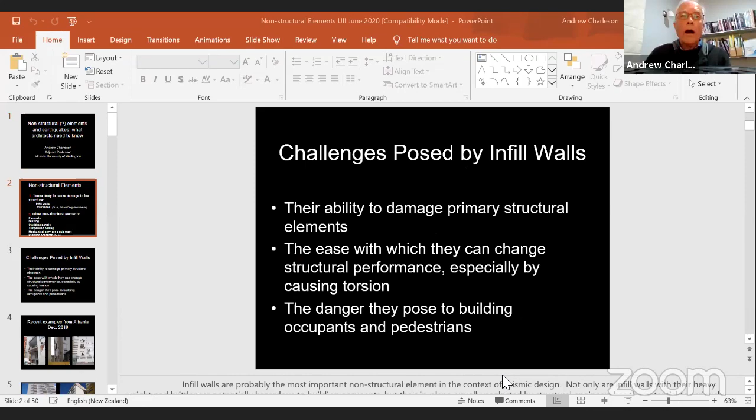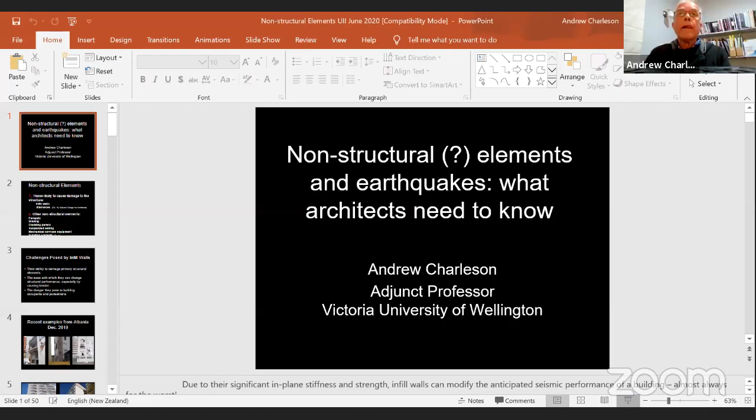Please excuse me, I'll just share my screen with you. And I just want to start the slideshow. Here we are. Okay, there we are. Is that clear? My first slide? Yes Prof, clear. Okay great, excellent.

First of all, you'll notice a rather strange feature of my title - I've put a question mark there, because otherwise it would say 'Non-structural elements and earthquakes, what architects need to know.' Today I'm talking about non-structural elements - elements that you as architects are primarily responsible for designing and specifying. But the reason for the question mark is that there are some non-structural elements that you design and detail, but because of their strength, these elements act as structural members without you perhaps even realizing it.

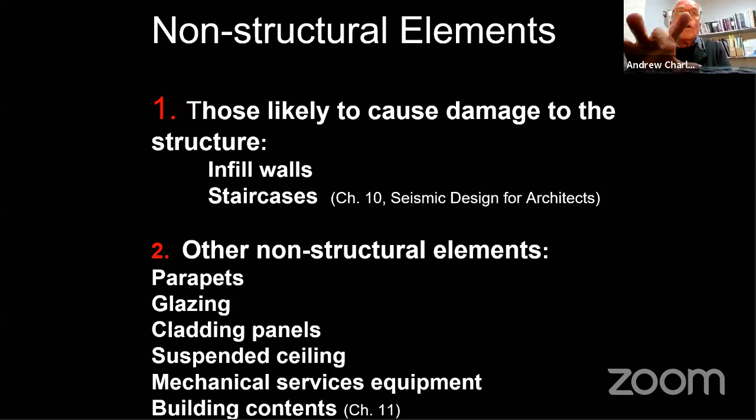So I'm going to start the presentation by talking about infill walls, because they have the ability to damage the primary structural elements, namely the columns of a building. They are also a problem because of the ease with which they can change the structural performance of the building, especially by creating or causing torsion - they can cause buildings to twist, which can lead to collapse. Finally, the challenge they pose is that they're usually quite heavy elements, so if there's a chance of them falling inside or outside the building, they're very likely to cause serious injuries to occupants and pedestrians walking alongside the building. These are the main challenges infill walls provide.

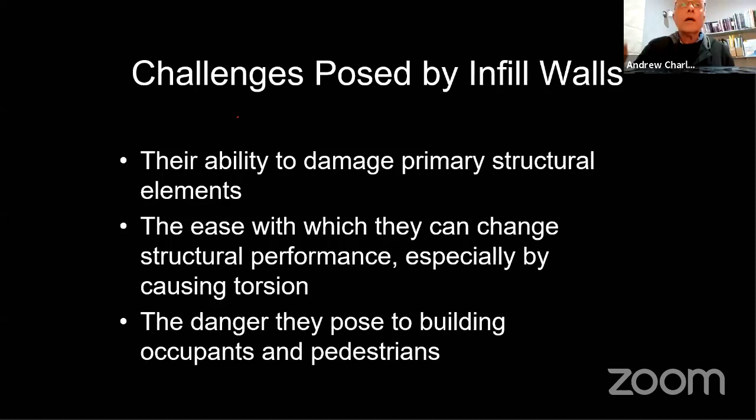I want to start my talk about infills by sharing a very recent personal experience. I visited Albania in December last year, about 6 months ago. Just one week before I arrived, Albania was hit by a moderate earthquake. It wasn't a large earthquake, it was moderate. Near the capital city where I was staying there was another city called Durrës that was quite close to the epicenter. A few days after my arrival, I visited Durrës, and these are some of the photographs I took.

I was just shocked at the amount of damage to infill walls. This damage is still very fresh in my memory, and it makes me very passionate about sharing my knowledge of infill walls with you.

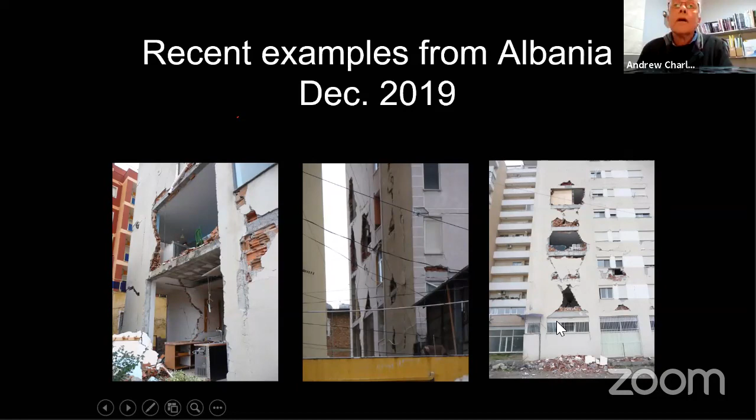Two final examples to show you. Here's another building - imagine living in these apartments. You'll see all the other infills have got big cracks in them, a lot of cracking and damage. This infill is cracked here, around here, and down there - it's almost on the verge of falling out. So many of them are.

The final example is a building we actually went into. Many of these infills have fallen out, and you can see directly into the rooms. This was one of the bedrooms we went into. Just imagine how terrifying it would be to be lying in your bed and have big chunks of infill falling around you.

All these infills were specified by architects because engineers generally neglect the presence of infills - we might talk more about that later. But it's your responsibility as an architect to choose the materials of these walls, specify them, and show them on your drawings. Not only infills, but also partition walls, because they are equally as problematic. So you can see how I had this first-hand experience just 6 months ago, and I'm feeling quite passionate about the problem that infill walls cause.

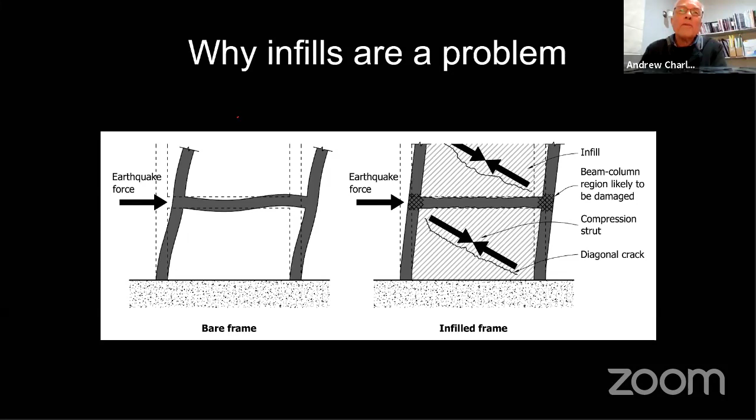So this is the explanation for why infills get cracked, how they form compression struts, and how those struts cause damage at the tops of the column and sometimes at the bottom of the column as well. So maybe you are starting to get one or two questions from my explanation. So please just type them in, and we'll come to them as we get to the end of the presentation.

Yes, Prof. Andrew, there is one question here from Pak Buti. Would you please explain again about infill wall? Does it mean a wall installed after the concrete structure is cast is not an infill wall, or the other one? Yeah, thank you. Yes, these infill walls are constructed after the structure.

So the columns are finished, the beams are finished, and then the mason comes and lays the brick wall. And so usually the brick wall is not anchored strongly to the columns or the beams. So that's the infill I'm talking about.

And what I said earlier was I'm not talking about confined masonry construction, where you build your masonry walls and then you cast your tie columns and your tie beams. Because we know that confined masonry, which you use a lot for housing in Indonesia, can be very effective at resisting earthquake, but not infill walls. They are problems.

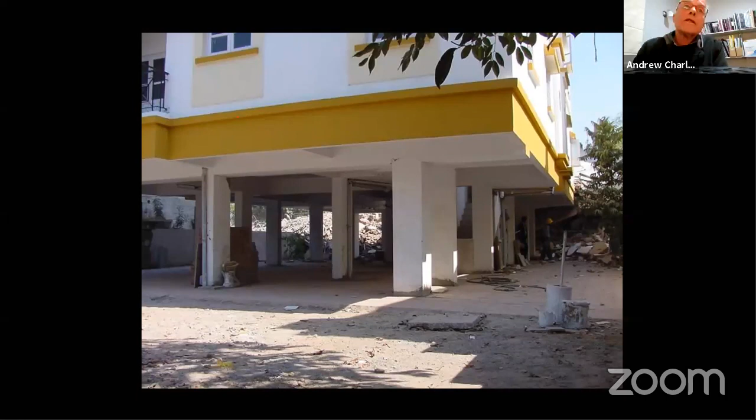And here's an example of a soft story building, actually in India. See how the ground floor is open? But above, you've got masonry infills, making the upper floors very stiff and strong. And so in an earthquake, these columns will get severely damaged and the building will probably collapse.

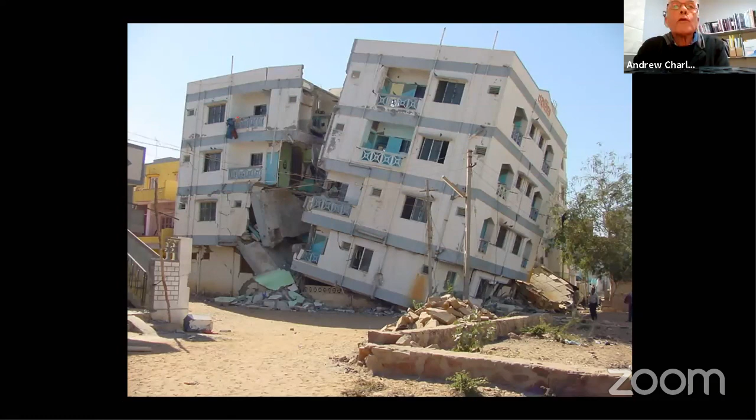I'm going to show you some examples of buildings with soft stories caused by the infills. And here's a building also in India. See how the bottom story has collapsed because it probably was open. But look at these strong infill walls. They haven't even cracked because they're so stiff and strong.

And so over here, you can see some diagonal cracks in the infills, but actually there's been quite a lot of damage to the infills, but this particular part of the building is still standing.

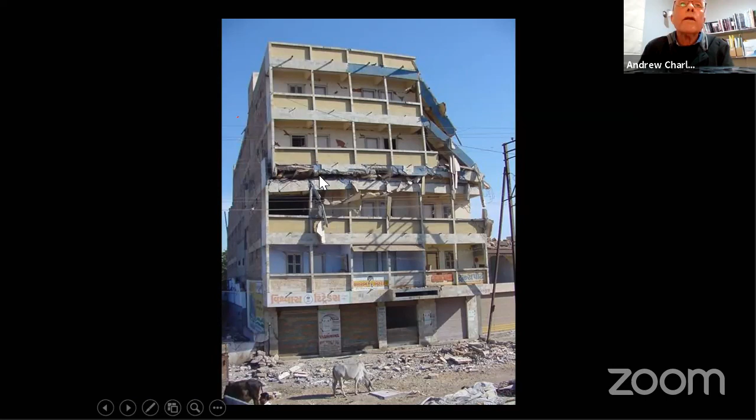Here's another building where the infills are quite badly damaged in most stories. But see, this story has collapsed because probably there weren't any infill walls in it. Maybe in this story, the architect had just used light cladding. But for the other stories, strong infills have been used, and that has made this story very weak, and the whole story has just totally collapsed.

Usually, it is the ground floor story that is the soft story. That happens in about 90% of the cases. So this is a bit unusual to have it mid-height, but it happens.

And so let's look at the damage to the tops and bottoms of columns. Here's a building that has been through a large earthquake. You can see the damage to the infills. Some have fallen. But if we look carefully, we can see the way, for example, this column has been damaged, caused by the compression strut up here. You can also see diagonal cracks in some of the other remaining infill walls.

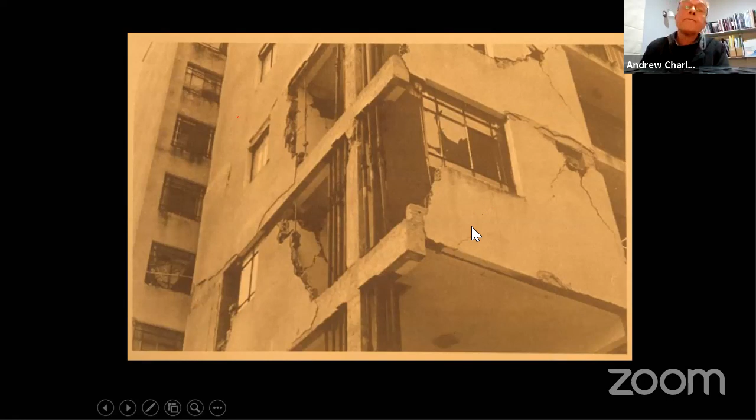Here's another building where the columns have been damaged by the infills. See how the top of this column has broken. The concrete has been lost and the bars are buckling. Here, the bottom of this column has gone and the top of this column has gone. And here you can see a diagonal crack has passed through these two panels.

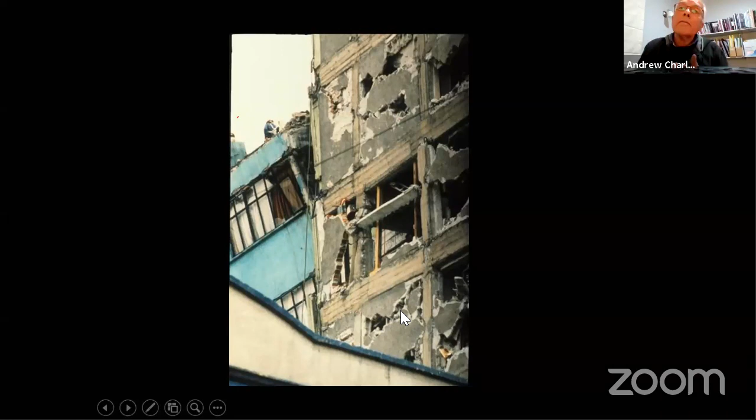You can see extensive damage to these infills because the frame is pretty flexible, and therefore the stiffness of the infills means that they will suffer a lot of damage. Here's an infill wall here that has caused damage to the top of this column. And so the whole floor slab has moved down and it's pushed the infill wall out to the side.

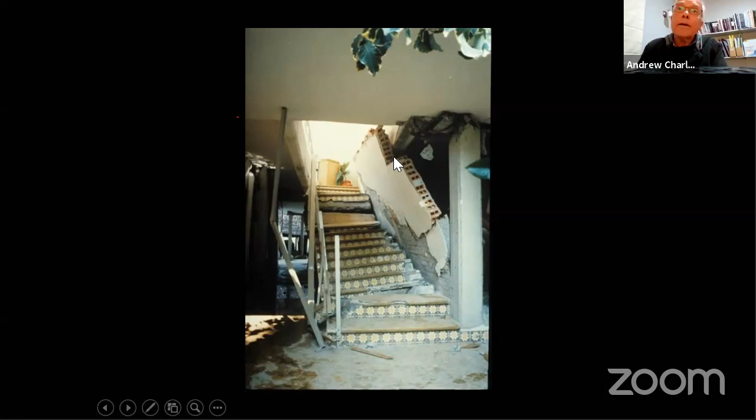And this is actually a supermarket building in Indonesia that I visited many years ago. It's near Lake Toba, actually, in Sumatra. And first of all, you can see some infill walls have collapsed and are sort of lying on the floor. But notice the tops of all these columns, badly damaged because of the compression strut in the infill before the infill fell over. And this damage occurs everywhere in the world during an earthquake where these strong infill walls are used.

I mean, these infill walls look as if they've been made from concrete blocks, don't they? I can't see any bricks actually. So this would be concrete block plastered to create the infills. And you can also see there's no connection between the columns and the beams and the infills. There are no bars sticking out, nothing to stop the infill falling once it gets a lot of cracks.

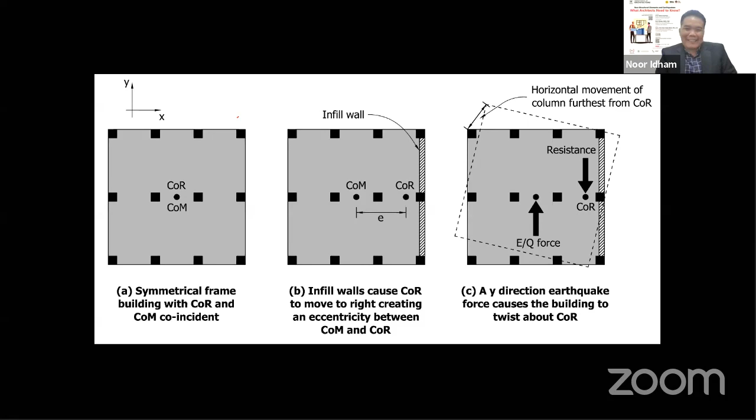Well, here we are. Now I'm going to talk about the solutions. I've been very negative so far. I've been just telling you about the problems. But my purpose has been so that you understand what the problems are. So now I've outlined the problems, I'm talking about the solutions, and there are going to be a number of solutions.

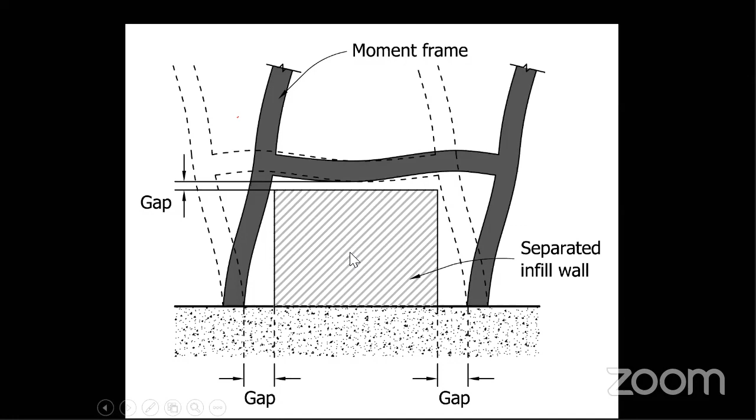Maybe someone can switch off their microphone, please. Yes, sorry, Prof.

Okay. Now, the idea is that we create these gaps between the edge of the infill and the columns so that when the frame moves in an earthquake, the frame will not hit the infill. And so the infill will not cause a diagonal strut to affect the structure.

And so in practice, in some countries, it looks like this. Here's the concrete frame. Here is the infill. Here are the gaps, physical gaps, maybe 2 centimeters wide, maybe wider. And then to stop the infill from falling from the building, we must have practical columns. You call them kolom praktis, I think. Practical columns, and they will stop the infill from falling at right angles to its length.

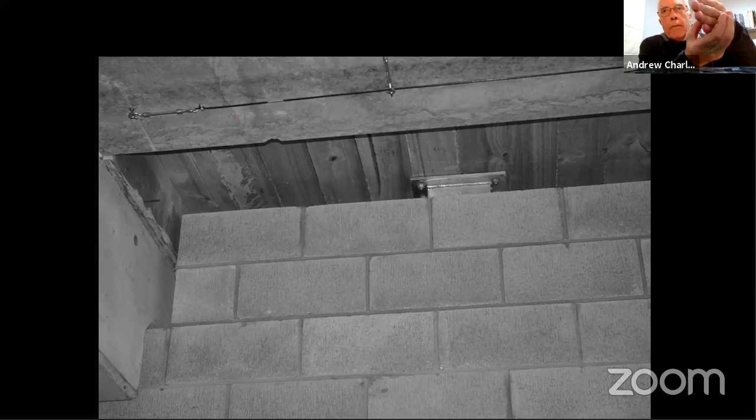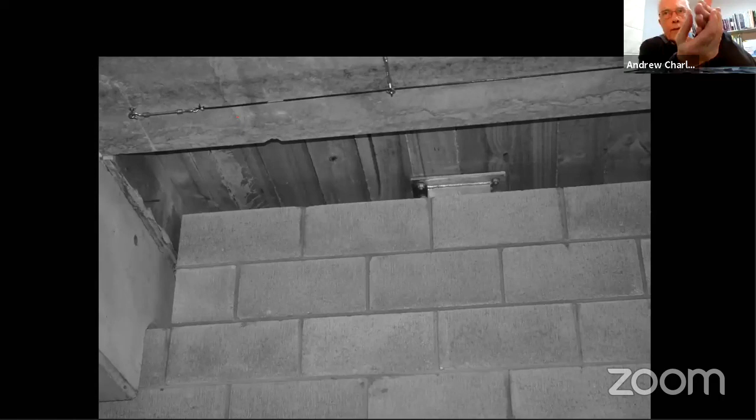And so in an earthquake, the floor above can move without affecting the wall. But the wall can't fall because it's restrained by the steel plate. And so the separation is achieved by allowing that steel plate to move like in a groove, but then to prevent the wall from falling by the strength of the concrete blocks, like that. I'll just go back. And so this is one solution to separate.

And so as the architect, you have to ask your structural engineer what gap you need, because the engineer has to do careful calculations to work out how much your building will move sideways during an earthquake. And your structural engineer might say to you, well, look, you need to have a 5 centimeter gap here. Now, you might say, look, that's too wide. I don't want to have gaps 5 centimeters wide.

And then the engineer could say to you, well, okay, if you don't want to have wide gaps, I can make the frame stiffer so that it won't move so much. And so then the engineer can make the columns and the beams a bit larger, and maybe the gap only has to be 2 centimeters. And so you as the architect can have negotiation and discussion with your engineer.

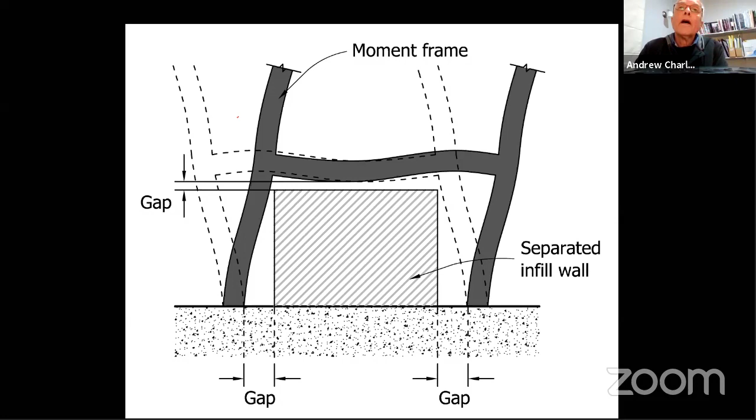But the good news is that there are other solutions. And we've already discussed one solution. Use lightweight cladding. So if you're using cladding of, say, plywood or... can you tell me what sort of lightweight claddings might you use in Indonesia these days?

You might use fiber cement sheets, mightn't you? Fiber cement cladding - well, that is very weak and light. No problem, it won't damage the structure. It won't cause soft stories.

The second option is to use, say, precast panels as infills, or maybe on the outside of your structure, but you design the connections of these panels to allow movement.

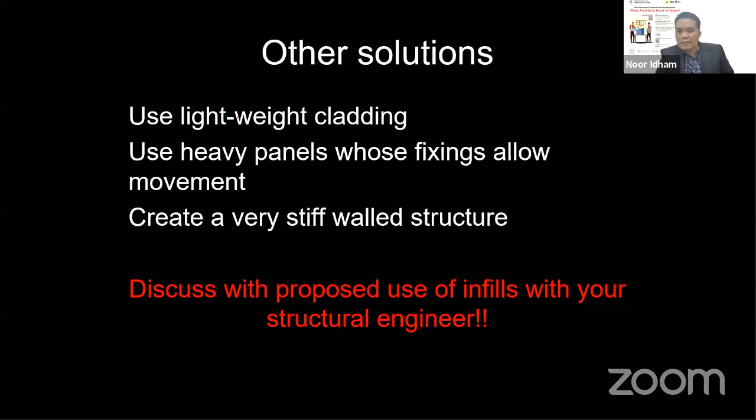Well, each building has to be evaluated separately. But say you have a building with an open ground floor with stiff infills above. One way to improve that building is to create separation gaps between the infill and the columns and beams, and that might prevent a soft story occurring. There are actually many different ways we might retrofit a building, and each building is different and has to be carefully considered on its own merits.

Heavy, stiff and strong infills are certainly a problem, except that if you had a building where your infills went right down to the ground, then the infills might be helping your building. In some instances, your infills can help, but the infills must start at the foundation and go to the roof, and they must be symmetrical in plan. Then it's possible for infills to be okay.

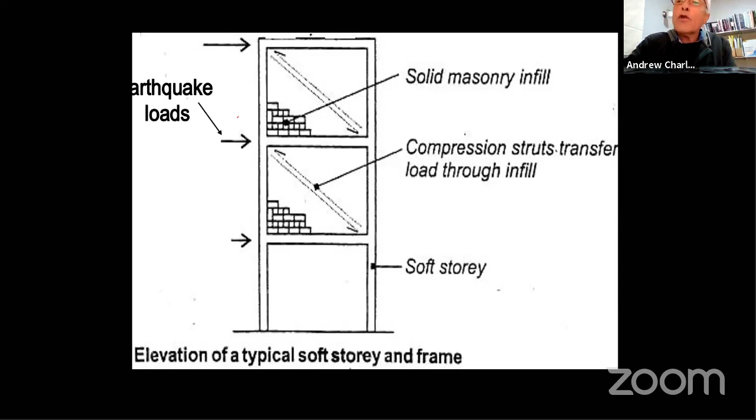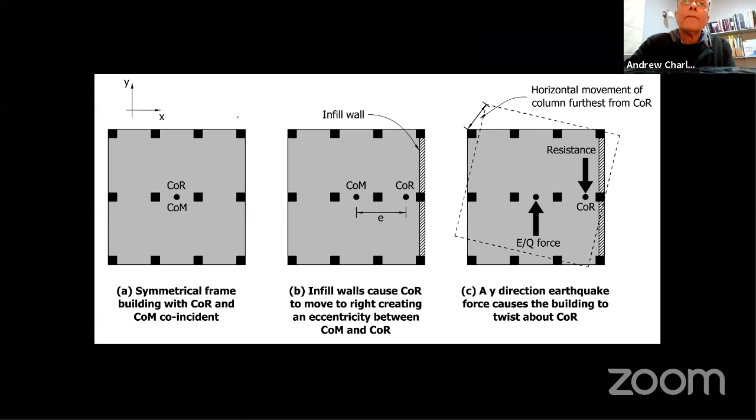But we might have to add some practical columns to stop the infills falling in or out of the building in an earthquake. That's all you might have to do, and that might make your building safe enough.

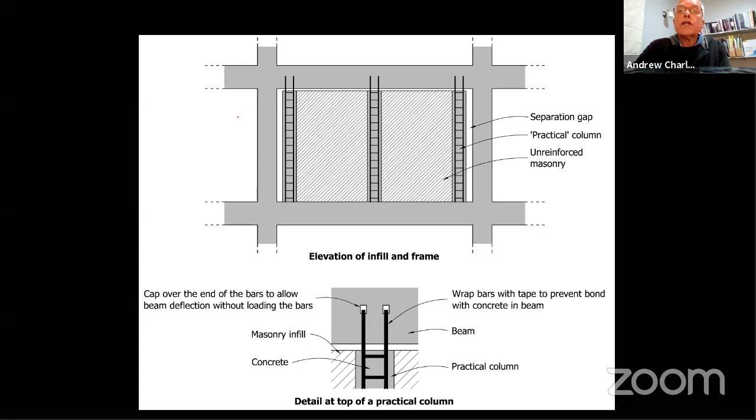Are there any other questions at this stage? Okay, please continue, Professor. Okay.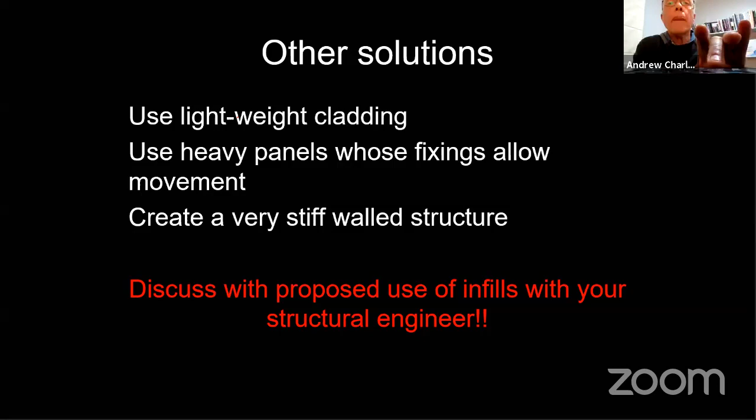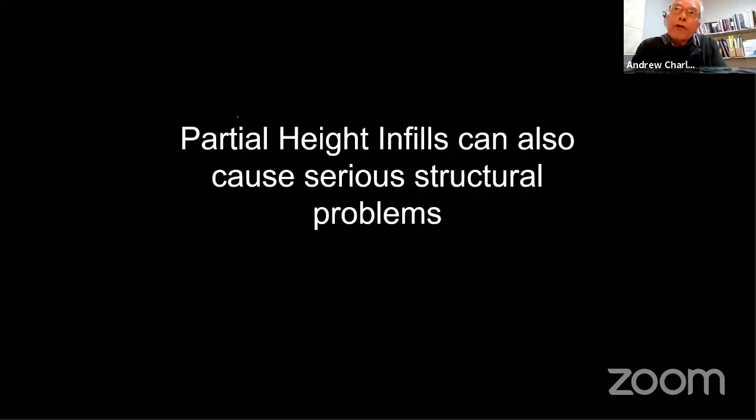I want to talk briefly about partial height infills because they are very common. Here's a frame, this would be glazing, so the infill only comes to this height. So how do we separate that? Well, we need practical columns to support the infill for what we call face loading, to help stop the infill falling.

Here are the gaps to allow for the movement, calculated by the structural engineer. And then to make sure that the infill doesn't fall when there's shaking, like this is a plan: here's the wall, here's the column, this is the gap, and we need like 2 steel brackets in the corners, and that will prevent the infill falling into or out of the building.

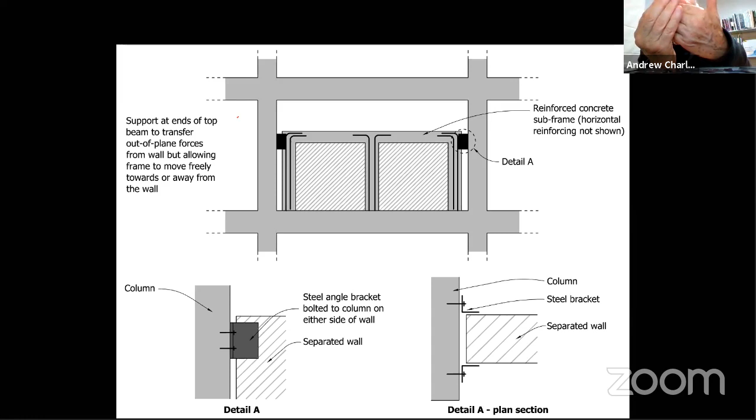This is a very crude detail, but it just shows you the principle. So the frame can move, this is the steel bracket, here's the wall, and the column will move like this, but there'll be no structural forces forming in the infill because of the separation. The infill can't fall because it's restrained by the 2 steel brackets.

This is what we would design in New Zealand or in California, Japan, and many other countries, something like this for partial height infills. If possible, we would try to make these infills lightweight, but if that's not possible, then we'd do something like this. Or we would use some type of precast panel cladding, and I'll discuss that in a minute, I think... actually, no, maybe I'm not going to discuss it.

Well, I think I'm leaving infills now. So just before I leave infills, shall I see if there are any questions?

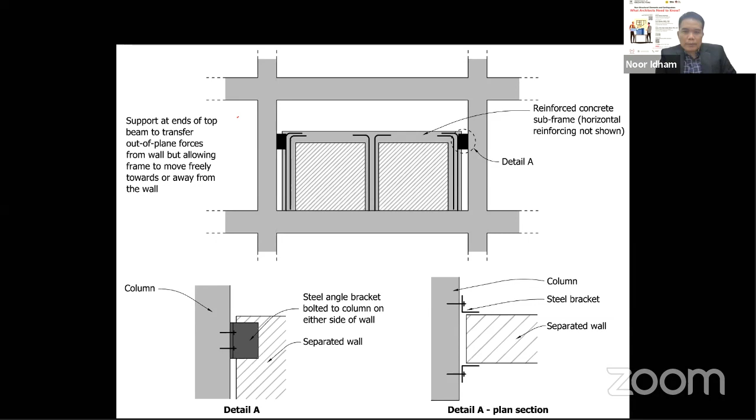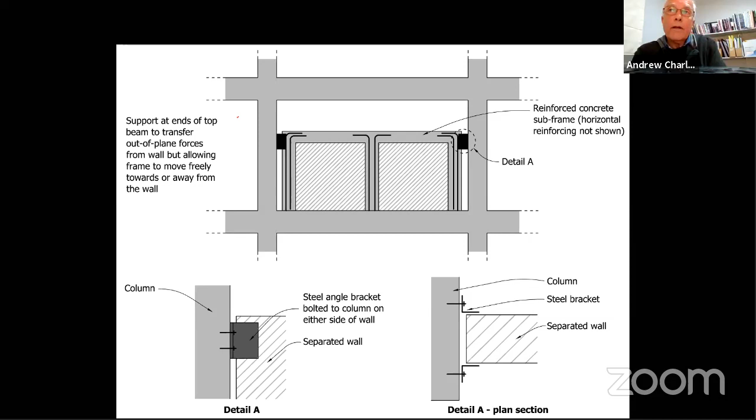You'll remember that there are only two types of non-structural elements that damage the structure. The main element is infill walls, and the second element are staircases. They can cause serious structural damage. But fortunately, the solution is so simple.

So what's the problem? Let's imagine a very simple scenario. Here's a building, and here are stairs going up each story like that. Now, in an earthquake, these stairs can function like a diagonal strut. So in many buildings, when there's an earthquake force pushing the building sideways, these stairs go into compression. And they can go into tension.

Of course, stairs aren't designed to be structural. They're non-structural elements. But if we're not careful, the stairs think they're structure, and they accept very strong compression or tension forces. And that causes a lot of damage to the stairs, and it damages the structure.

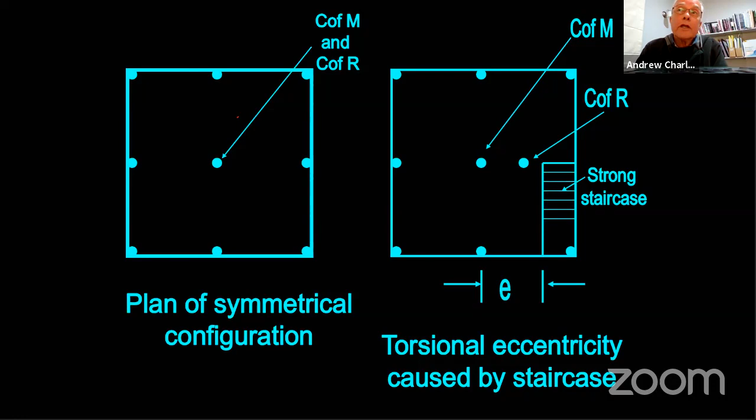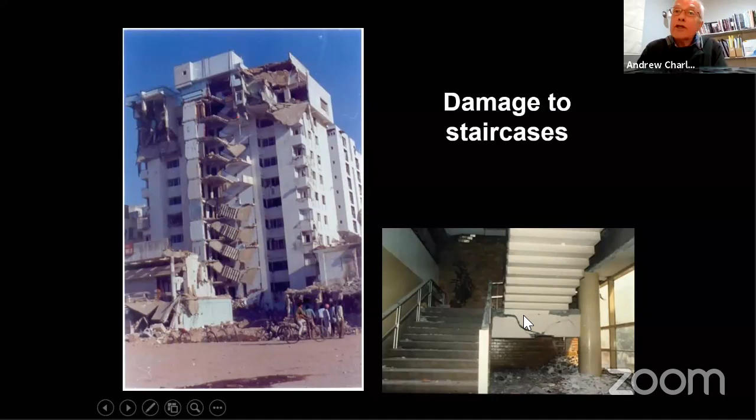The solution is so simple. We imagine we put the bottom of the stair on a roller, so that during an earthquake, when the floor above moves, the stair just slides on the slab beneath. A simple sliding joint is all that we need as a solution.

It's so simple. So what we do is we have just maybe a plastic sheet here, and there's no bond between the stair and the slab. Just sliding can occur. And then if we do that, the stairs just slide on the slabs and they don't become structural members. They don't cause damage and they are not damaged. It's a perfect solution. Incredibly simple.

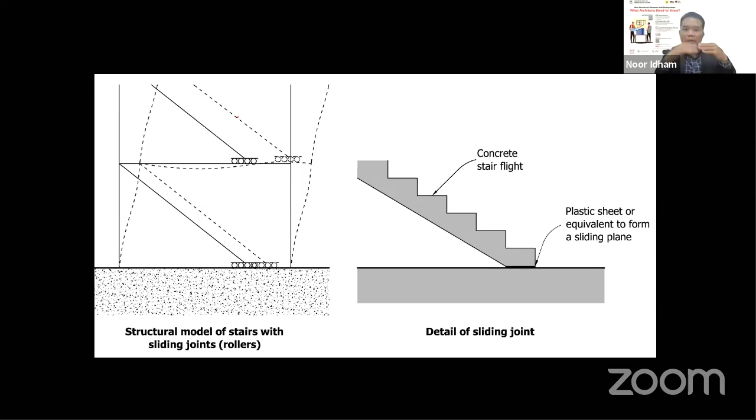Yeah, that's such a good question, and that person has got a very good understanding of how to solve it. Have a sliding joint either at the top or the bottom, really simple. And the material for this separation is just only a sheet, isn't it? Yeah, I've shown there a plastic sheet, but anything that allows sliding works. You don't actually need anything special, it could just be concrete sliding on concrete, as long as there's no bond between them.

Question from Ibu Rosmiati Arifin and from Pak Jafar as well: What about the symmetric way, Prof. Andrew? Sometimes in buildings, we put the staircase in a symmetrical way. So will it have a problem with this, or do we still have to use this separation at the bottom of the staircase?

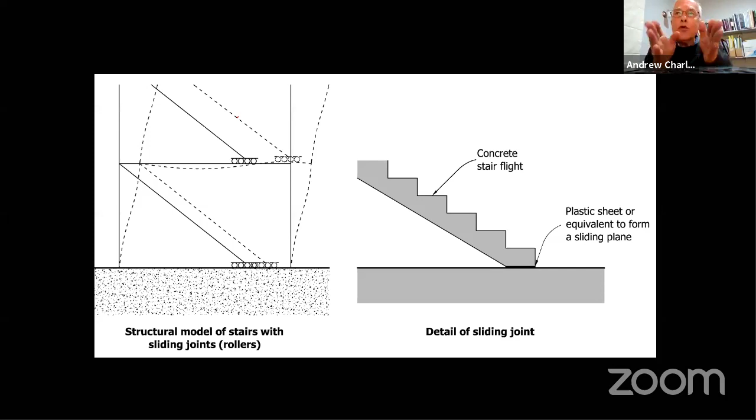Yeah, you should always use a separation because the building is going to move, it's flexible. If you have two stairs that are symmetrical, okay, there's no torsion, so that's good. But you will still get the diagonal struts forming, and that means that the stairs will get damaged or they will damage your structure.

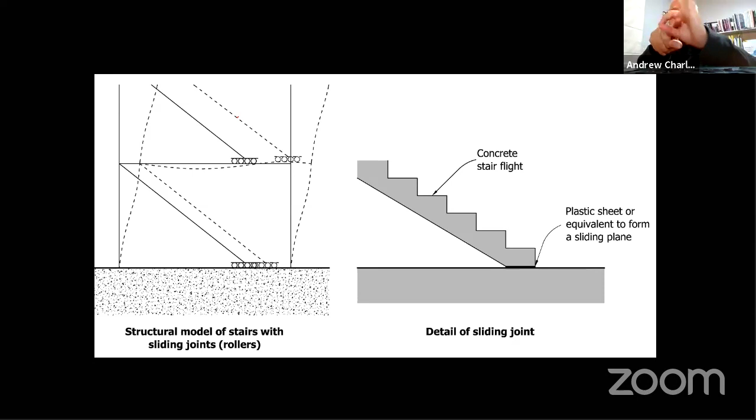So as a rule of thumb, every stair needs separation. And even if you have steel stairs, what you would do is have a bolt in a hole so movement can occur. Always allow for that movement to occur.

So including a staircase in the core, for example, do we also use this technique? Yes, that's right, you should do it in the core as well. You don't need to do it if your building has very stiff shear walls, because then there's going to be very little movement, so you don't need to separate. But for the vast majority of buildings, we need to have these sliding joints.

But as I say, the beauty is that they're so cheap and so easy to make. There's really no problem with them, we just have to detail them and specify them.

Is there any instability issue if we separate this from the main structure or stairs themselves? No, none. All that happens is the bending moment diagram will change a bit, because the engineer might assume this end is fixed and this end is fixed, and therefore the stair can be a little bit shallow. But if we have a pin sliding joint here, it does mean the stair has to be a little bit deeper, just a fraction.

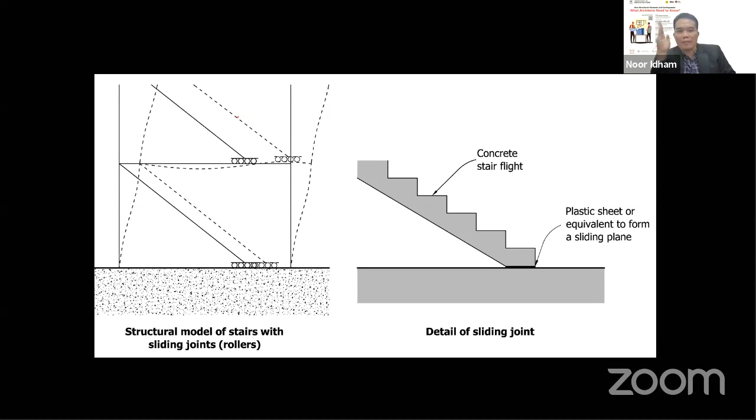From Pak Budi: is it better to put the supporting element not at the end of the stair, since the end of the stair needs to be separated? For example, putting a supporting column in the middle of the stair - is it needed? No, not needed.

You could have a stair like this made of steel or concrete, spanning between here and here, and as I said, here you'd have your sliding joint. If you wanted to, you could put a column here, but you would still need the sliding joint here. Otherwise, you're still forming this diagonal strut, aren't you, even if you have a column just supporting your stair. So you can have a column here if you want, but you still need this sliding joint, otherwise we get this problem of compression or tension in our stair that will damage it, it'll collapse it maybe.

Prof, from Pak Jafar: what about the other side on the upper part, is it the same thing? No, here you will cast your stair into your beam and slab at this level, so your stair will be strongly cast into the concrete structure. Because half the weight of your stair has to be resisted up here, and the other half can just rest on the slab. So yes, we must definitely have a strong connection at the top of the stair.

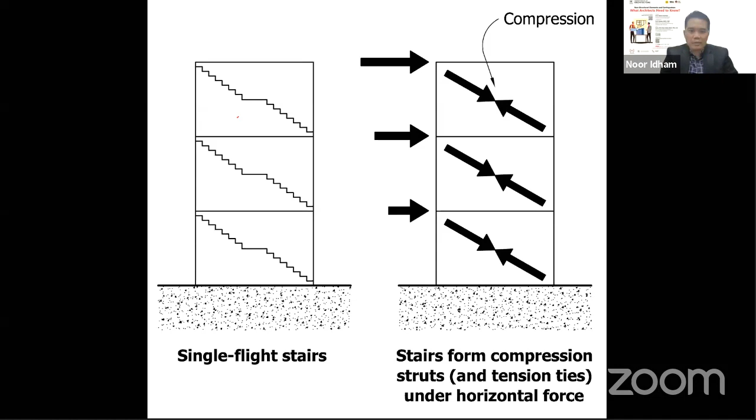Okay, now I'm going to talk about all the other non-structural elements that we have in our buildings, that we as architects have to think about. And I'm going to start with cladding. Often we use infills as cladding, don't we?

But in many countries - here's an example of a building in Australia, after an earthquake, that was a brick building with a brick veneer. This is the load-bearing masonry, and this was the veneer for weatherproofing. During the earthquake shaking, the cladding just fell off. So if we want brick cladding, we need to provide little posts attached to the structure at the top and bottom, and then ties - the best are stainless steel ties so they don't corrode - so that in the shaking, the veneer is supported by these vertical timber or steel posts or studs.

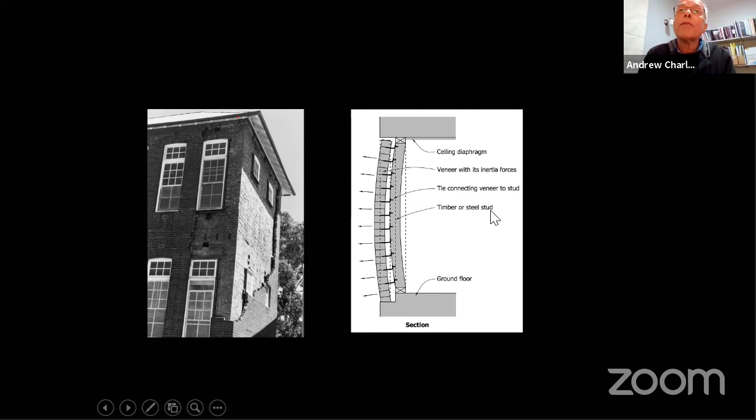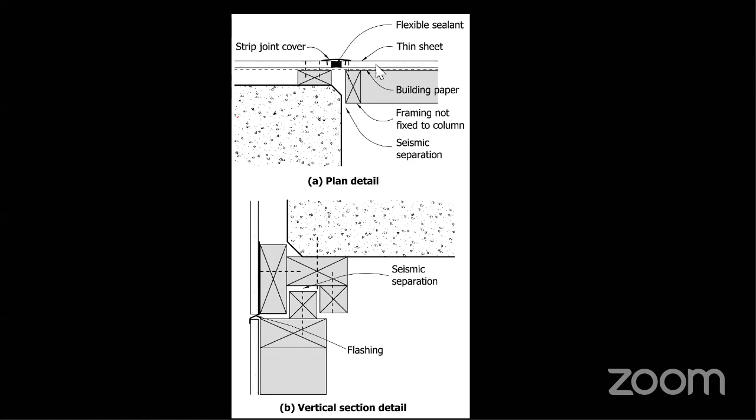And if we look in plan, we also have the same idea. We have the sheet and gaps and so on. Here's a column. Here's the sheet cladding. Maybe some sealant, maybe a plastic cover. And so we have this very flexible skin on our building that can accommodate the earthquake movements of the structure. Very common in earthquake zones.

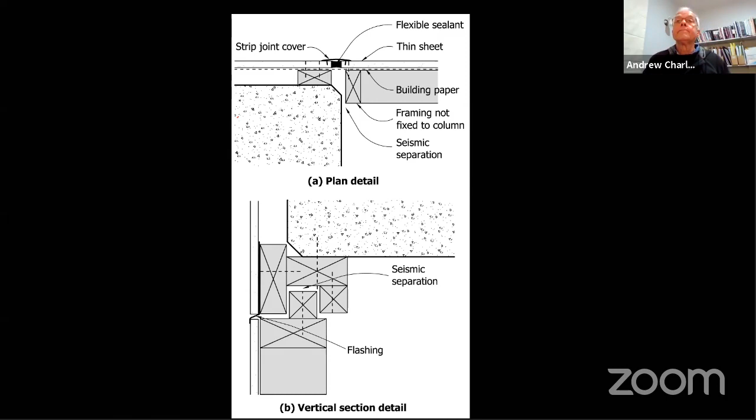Any questions about cladding? Not yet, Prof. Okay, let's move on to glazing. Yes, one question here. Prof. Andrew, what's the dimension of the elongations, brackets, and how deep are they embedded to columns?

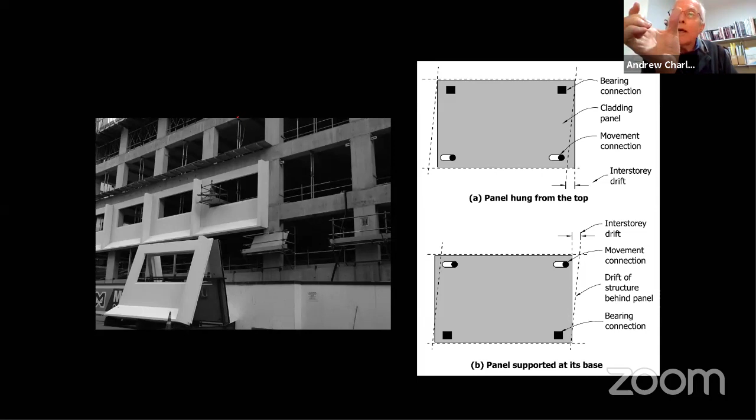Yeah, that's a great question. Well, once again, the length of that elongation is given to us by the civil engineer. The engineer has to calculate how much the building is going to move in each story. And the elongation depends on the flexibility of the structure. If you've got a very flexible structure, that elongation might have to be up to 15 centimeters. If your structure is quite stiff, the elongation might be 4 centimeters.

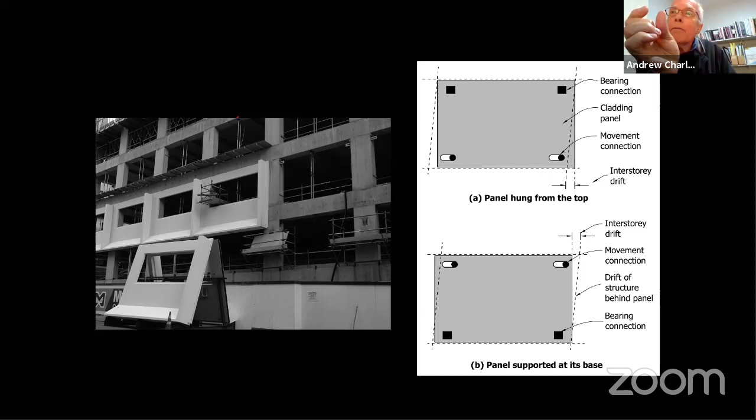So it will be the same principle with the gap of the infill walls. Exactly, exactly.

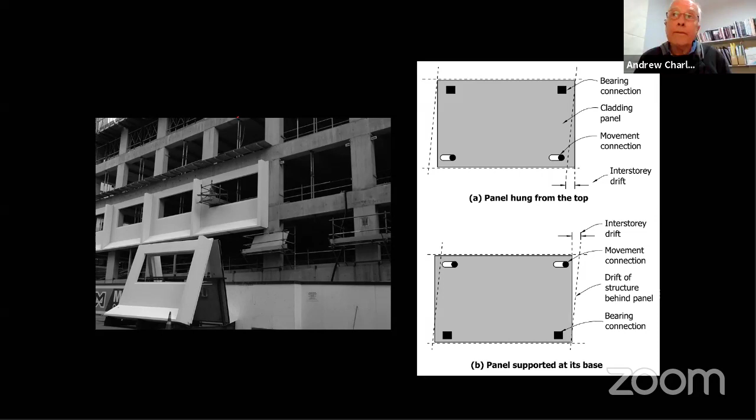Okay. It was from Bu Elfa Suryani. Thank you, Prof. Thank you. Yeah, it's a really good question.

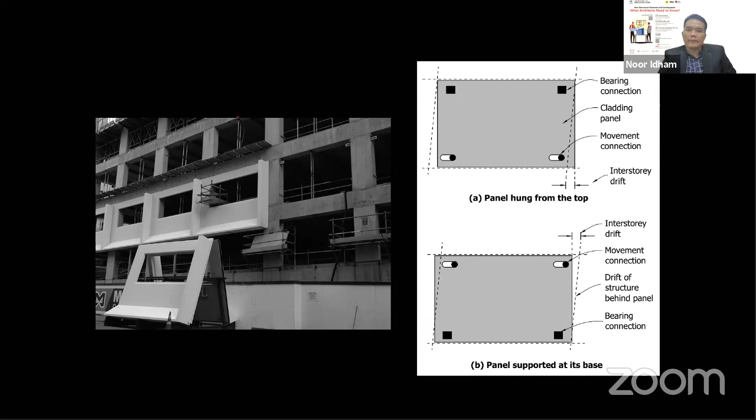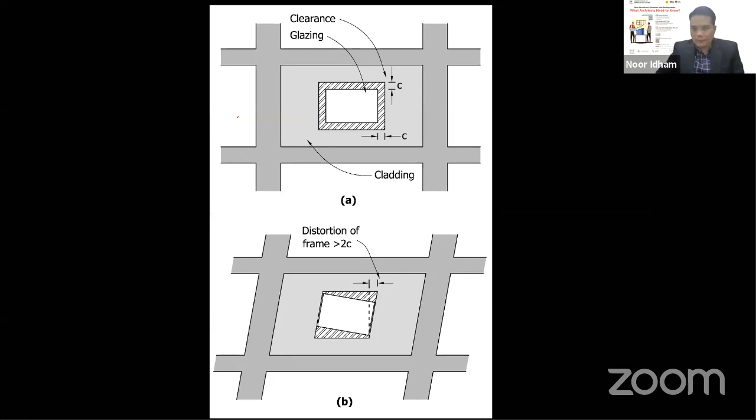And so we take that same principle into the glazing. In a building, when the building moves sideways due to flexibility, the windows are in danger because once again, this diagonal gets shorter. And so the principle is that whenever we put glazing in, we must have a clearance gap between the edge of the glass and the mullions or the structure. A little physical gap between glass and the frame.

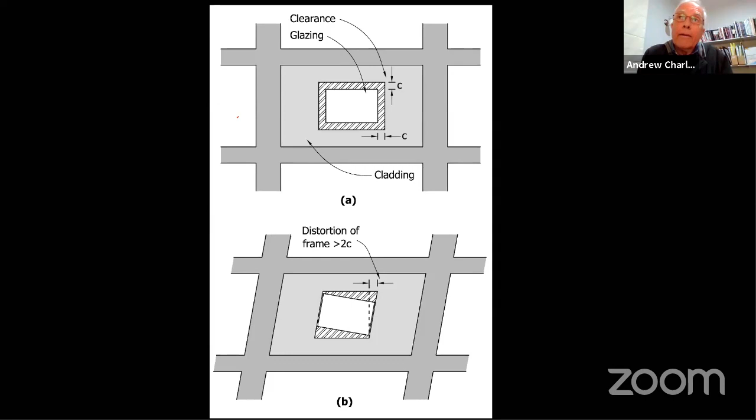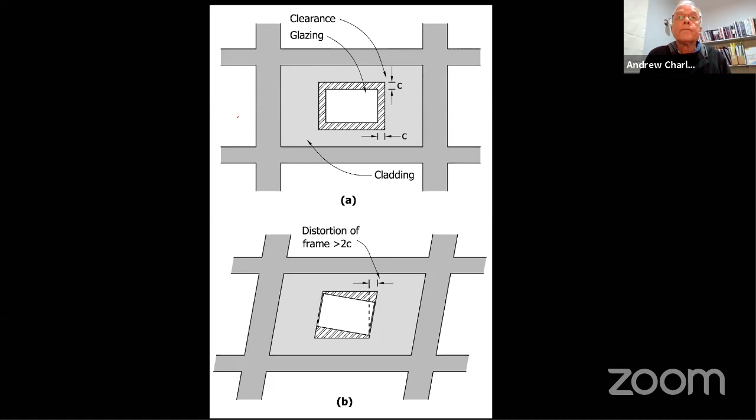And so once again, we need to ask the engineer, especially for a high-rise building, what gap do I need, please? Because otherwise, if there's no gap, the building sways, all the windows get broken, and the glass is very dangerous because it cuts people. And so this is the philosophy. We always have this clearance required around the edge of the glass.

Oh, I'm sorry, I haven't got any details to show you today in my book. But if you look at the information about glazing in high-rise buildings, you will always see there is allowance for movement. The glass is never hard up against the frame. There's always a clearance gap. And so when you are designing your building, before you write the specification for your glazing, you just go to the engineer and say, engineer, how much gap do I need?

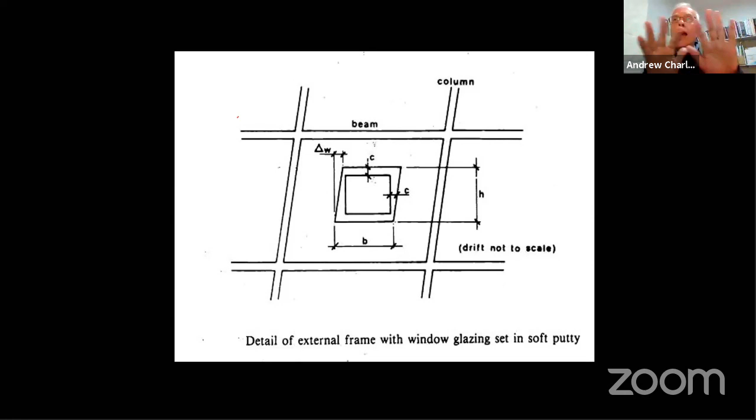You know, does it need to be 0.5 centimeter or 2 centimeters? And the engineer has to do the calculation for you. And then you know that when the building sways to and fro, the glass is not going to shatter. It's separated. So we come back to the same principle, don't we? Separation. It's a very common principle for non-structural elements.

Shall I move on? Yes, please.

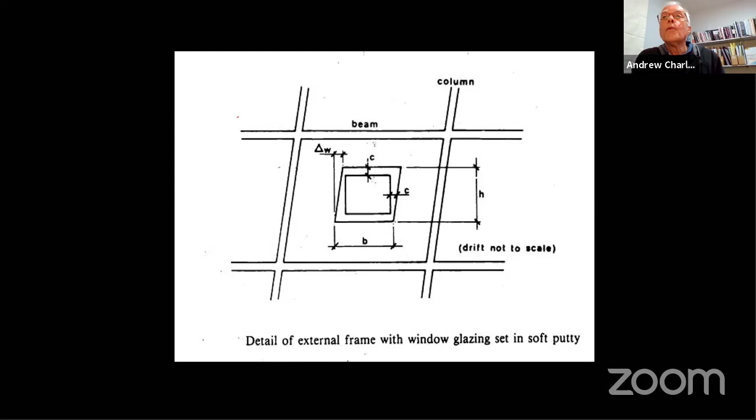Parapets. Parapets at the roof of buildings are very dangerous because at the top of buildings is where the accelerations are worst. Because during an earthquake, a building resonates, and at the roof level, any parapets often fall off. And so what we have to do is to design simple steel brackets to prevent the parapet falling. Or we can provide practical columns in the parapet also to stop that falling under the influence of the shaking. So they're quite simple to restrain. So for parapets, we must restrain them.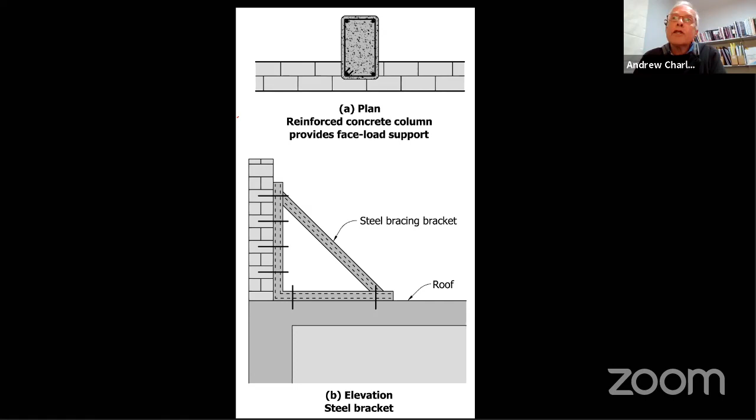What about partition walls? Well, if you can, you should always use lightweight partition walls because you are having a lighter building, you can save costs in the foundations and in the structure, and you make your building a lot safer. And so, if possible, use light partitions.

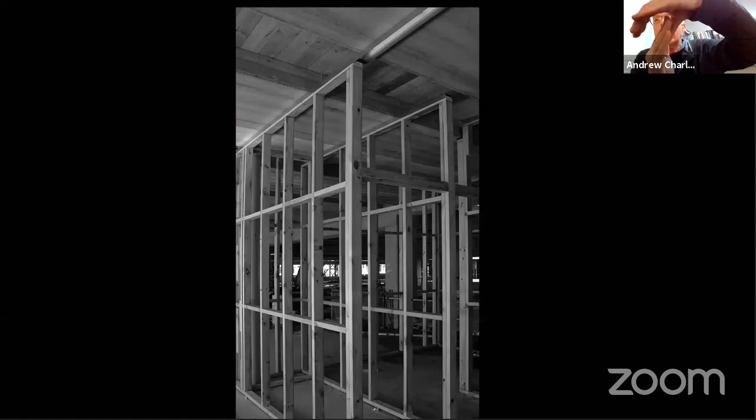I mean, in many buildings, we won't worry about this channel, because if we're using lightweight partitions, they can absorb the earthquake movement, sometimes without much damage. And a lightweight partition will never cause damage to the structure. It's too weak, it's too flexible. So we don't need to worry about that.

But if we're with a client who wants to protect the partitions from damage, this is one option, something to have a sliding connection like that. I mean, that might be a good investment for a building where very expensive finishes are being used. It could be quite a good investment.

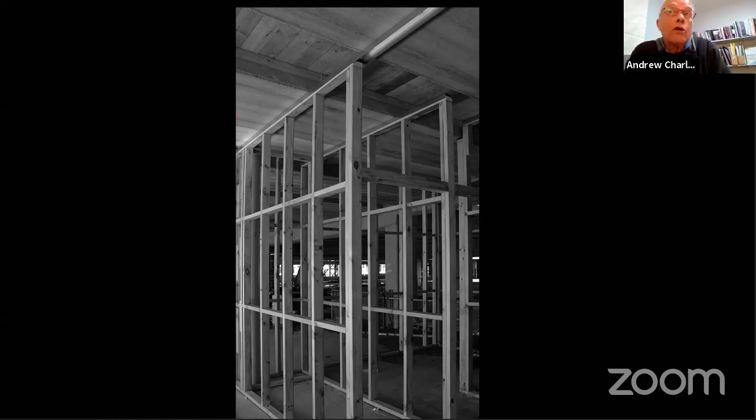Okay, suspended ceilings. If you go to the internet and search on Google for suspended ceiling damage, in every earthquake, hundreds of suspended ceilings fall, and they can injure people quite badly, or they cause havoc. And so there are three solutions to suspended ceilings. Sorry, I'll go back. We can brace them.

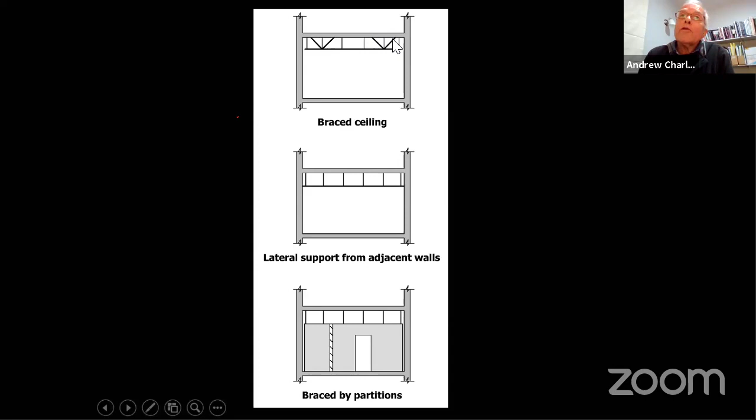See the diagonal bracing? Here's the suspended ceiling, just hanging from wire ties, as usual. But usually we don't put in the bracing. And so during an earthquake, the suspended ceiling shakes around like a pendulum, and it crashes against the walls, and it causes so much damage. So this is what we usually recommend. We brace the suspended ceiling. It costs a little bit more money, but it means that the ceiling won't collapse in an earthquake. And there are two other methods there too.

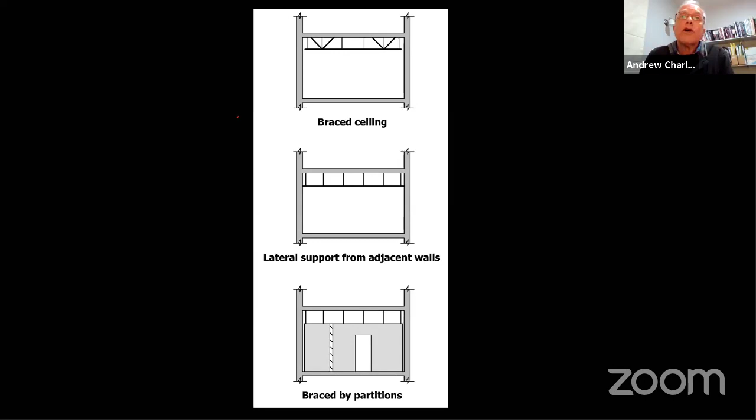So if we brace the ceiling, it looks like this. Here's the suspended ceiling with the ceiling tiles. They are hung from wire supporting the ceiling runners, which would be aluminium probably, or it could be steel. And then every now and then in plan, here's the bracing bolted to the floor slab above.

And so in plan, if this is your ceiling, say every 5 meters, brace in this direction to withstand shaking in this direction, and then in the X direction, a brace here, a brace there, and a brace there. So it's quite simple, but we have to be very strong as architects to make sure that this bracing is done properly, because most contractors don't like doing it. Okay, so suspended ceilings we restrain them. We stop them shaking like a pendulum.

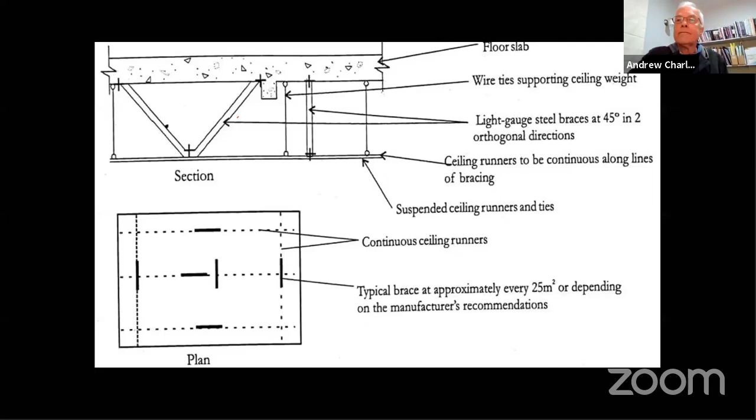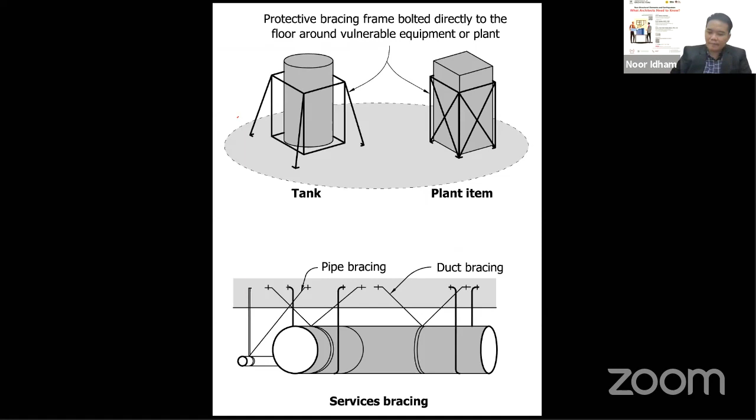Yes. What about mechanical equipment and things like water tanks? Well, we have to restrain them. And so when these items are installed in the building, we've got to make sure that they are restrained. Otherwise, in an earthquake, they're going to slide or they're going to overturn. And I mean, the problem with water tanks is that if a water tank overturns, the water spills and it trickles through every floor of the building.

And you've got to refurbish your whole building. Everything has to be ripped out because it got wet and things get rotten. And so, you know, it's really important to restrain your tanks or your mechanical equipment. Otherwise it'll get flung around, especially if it's at the top of the building where the accelerations are maximum.

And so as the architect, you perhaps need a conversation with your mechanical engineers and check that all the items are bolted down, they're secure, they're restrained. They're not going to overturn or collapse. And even piping should have simple diagonal bracing as well to restrain it from shaking. Otherwise the pipes will break and the water will go everywhere, and it'll be incredibly costly for your client to repair.